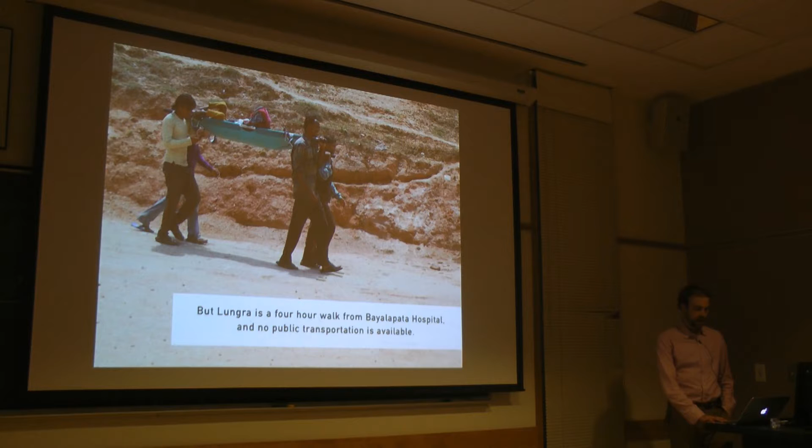This regional hospital serves a large part of Acham, but it's a 4-hour walk from the Lungra Health Clinic. So it's really difficult for people to reach it in time if they have an emergency or if there's some reason that they need to reach it. So basically they're on their own for all intents and purposes.

And before we built the array, the Lungra Health Clinic had no access to energy. So a number of things that we take for granted were totally impossible. This is maybe unintentionally ominous — I guess lots of babies are delivered in the dark, but of course this and many other procedures and things we take for granted are really difficult when you have no access to light, no ability to power basic medical machinery that can prevent easily preventable instances of infant mortality or other diseases. So it's a big problem. There were even instances where you couldn't charge your cell phone, you couldn't power any sort of light source.

So what SunFarmer did, in partnership with a group called Possible Health, or locally known as Nyaya Health — you might have heard of that name as well — we formed a small local committee that would be able to manage and take care of the array after it was constructed, because as mentioned before, it's a 14-hour, maybe 20-hour journey to reach this health clinic. So you definitely don't want to rely on any sort of maintenance crews that have to access it. We wanted to make sure that the local community was really involved in understanding what functions the array would perform, and that they would be able to assist in repairing it.

So we built, I think it was a 1.2 kilowatt array that, in addition to providing lights and powering some small medical machinery, can also power refrigeration for vaccines and other services. In partnership with the government of Nepal and many supporters around the world, we were able to complete the project.

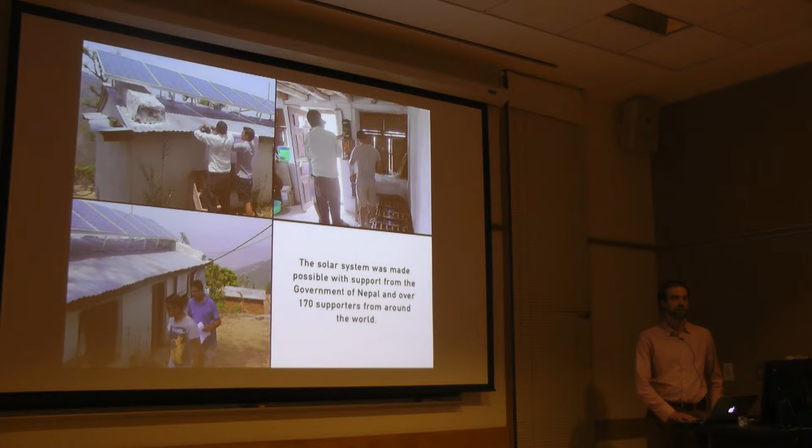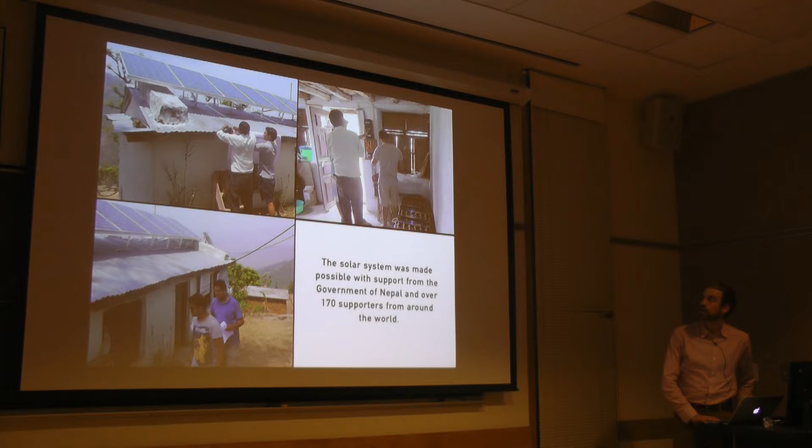This was one of about, I think, 15 health clinics we built in this series. You can see here there's an array of lead-acid batteries, because when you have no grid, you have to put the energy somewhere when you're not using it. And you can see that there's just very simple roof racking to put the array on the rooftop. So now the health clinic has access to energy, and there's a lot of improvements that come with that.

So I just wanted to start with that really simple story. Of course, a 1.6 kilowatt array is quite small, and while the impact for a number of people here could be quite large, it's not on the systemic scale that a place like Nepal and a lot of other places in the greater Himalayan region require to actually get them out of pervasive energy poverty, where there's just totally inadequate electricity generation relative to demand. So I think I want to spend the rest of the talk talking at a sort of bigger picture.

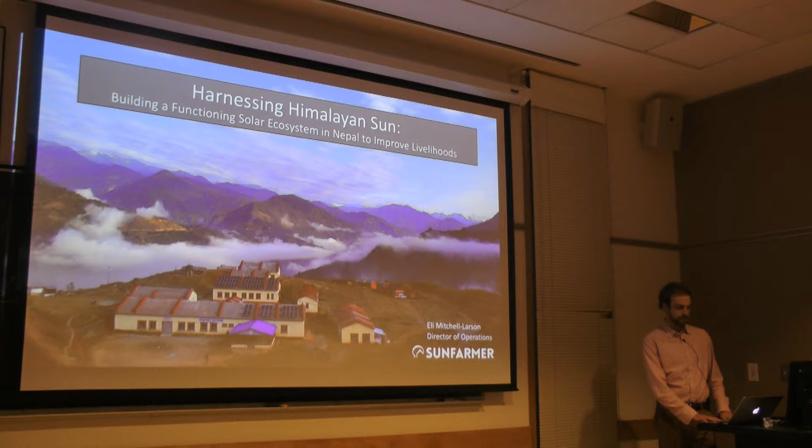How do we get to a systemic scale of solving energy poverty and providing energy access? What are the big opportunities for doing that, and what are the barriers to achieving it? So first, we're just going to talk about the basic problem.

Is this covering the screen? I guess it's a little bit wide.

Nepal's development is perhaps stymied by a lot of things we could discuss, but one that's very clear is lack of electricity. Here's an image of Kathmandu, a lot of these are telecommunication lines. There's probably some pilferage where people are drawing their own lines off the main distribution line. But basically, Nepal's development is held back by a lack of electricity generation.

And that's despite really bountiful resources. I think Nepal has the second highest hydro resource of any country, so there's huge potential, gigawatts and gigawatts of potential generating capacity. There's also a really great solar resource. But despite that, those projects haven't seen fruition yet.

And third, it's really difficult to extend the traditional hub and spoke model grid to these remote regions. It's extremely expensive and probably uneconomical. So there's a real need for a distributed solution. The challenge we see is: how do you bring power to the people that need it most, but in a way that's scalable, cost-effective, and equitable?

In the health clinic example, I think that's a really great project, but it relied heavily on donor funding, and it's not clear that building a series of 2 kilowatt health clinic arrays is going to bring energy access across Nepal. Obviously, we need a more scalable solution.

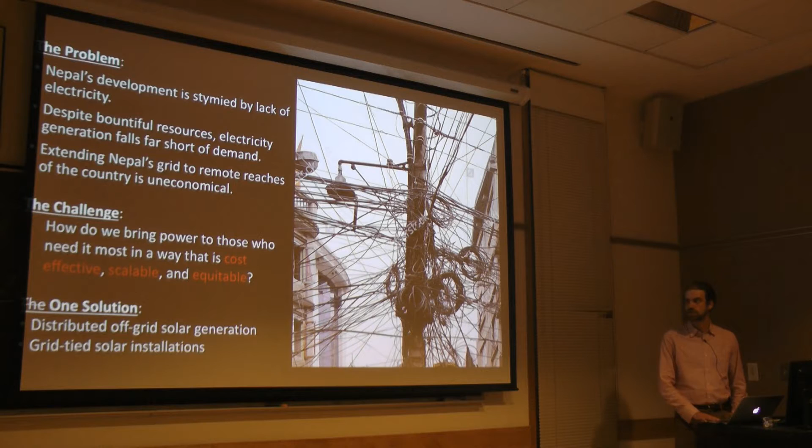So the solutions I want to talk about today, and definitely not the only solutions, because of course large hydropower could also solve a lot of these problems, not all of them. But the solution I want to talk about today is distributed off-grid solar generation as well as grid-tied solar generation.

So first, just a little bit about electricity in Nepal. Basically Nepal is starved for energy. The total fleet, the generating capacity, is around 800 megawatts.

Please stop me if any terms I'm using, or any energy-specific talk, needs a little bit of clarification. But just to put it into context, 800 megawatts, this large pie chart, compared to the New Haven power plant, which is 576 megawatts, compared to the Yale Central Power Plant, which combined can produce about 18 megawatts at full load. And of course, neither of these power plants need to operate at full capacity for a lot of the time. So that just puts it in perspective how an entire country of 30 million people has a generating fleet that's not significantly many orders of magnitude bigger than what we use to power our city.

And also grid access is low. So only about half the people in Nepal have access to grid connectivity, but many of those people, there's very little energy flowing through that distribution network. So you might be technically grid-tied, but in reality you don't have great access to power.

In urban centers like Kathmandu, pretty much everybody's on the grid, but as we'll see in the next slide, that does not mean they have consistent access to power. In rural areas, of course, very few people have access to the electrical grid. And of course, demand is rapidly increasing.

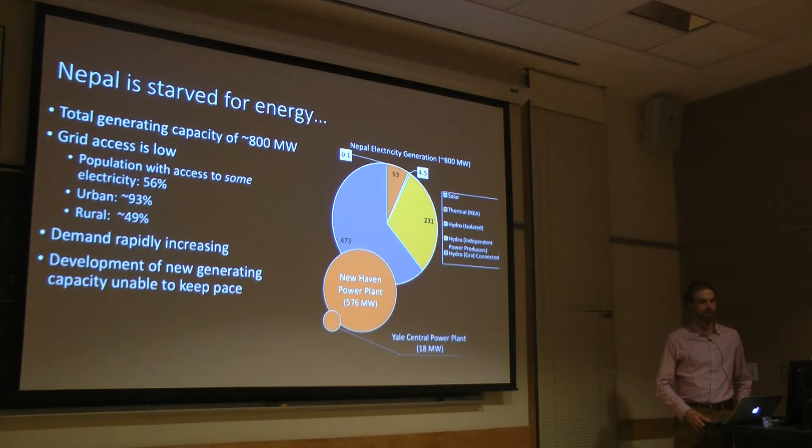And then you can see there's just 0.1 megawatts, that's the entire solar fleet. This data is a couple years old, so it's a little bigger now, but just to put it in context, I think the largest solar array in Nepal is about 700 kilowatts, so less than 1 megawatt.

So what does this mean, to have inconsistent access to power? It means individuals are forced to plan around the uncertainty of what times of day they're going to have access to energy. All kinds of sectors of life are affected, be it access to health, transportation, or education. And small businesses suffer greatly as well.

Rolling blackouts, when the utility deliberately shuts down different portions of the grid at different times of the day, are hugely impactful to small businesses that require certain hours of operation. So all of a sudden they have to shut down at 7 or 8 p.m. when they have no access to light, and that can be really devastating.

And then in terms of industry, inconsistent power could force you to shut down production. Maybe you have a line with 50 employees and all of a sudden you have to send them all home because the power cuts.

Furthermore, any sort of rotating equipment or large processing machinery requires regulation of the grid's frequency. In the US we do this to a very high degree, regulating our frequency to 60 hertz within plus or minus half a hertz. In a place like Nepal, it's extremely variable, and that can be really damaging to industrial equipment.

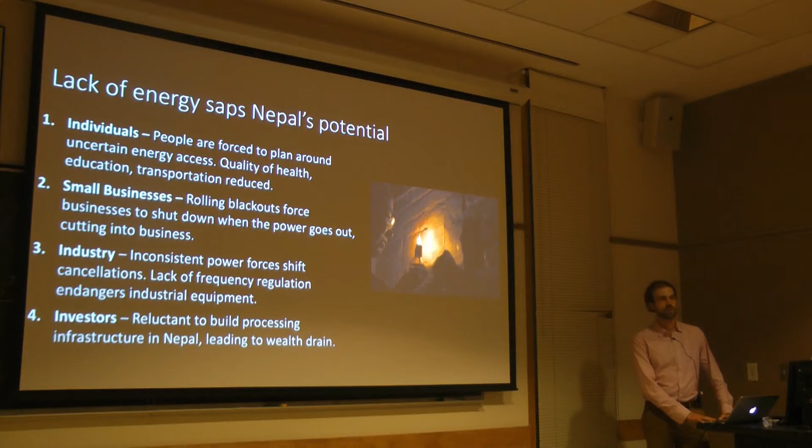This causes investors to hold back on building out that kind of infrastructure because they're not sure their investment is going to be safe. Investors are reluctant to build processing infrastructure because they don't have the power to do so.

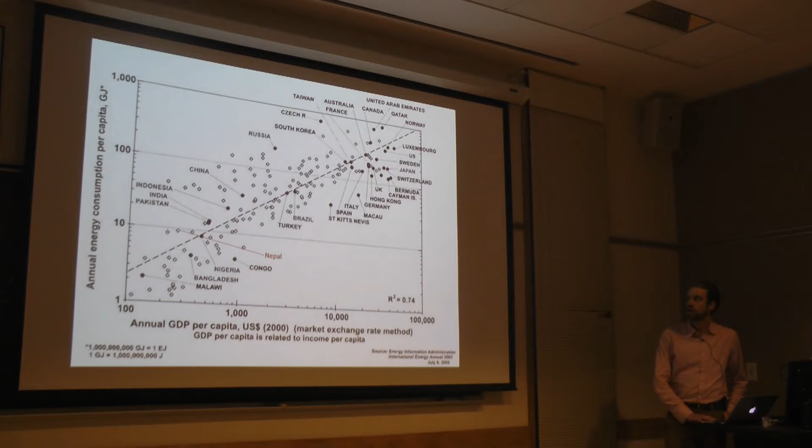One of the issues with Nepal's energy mix, as you saw earlier in the graph, is how much it's dependent on hydro. That has huge implications both economically and politically.

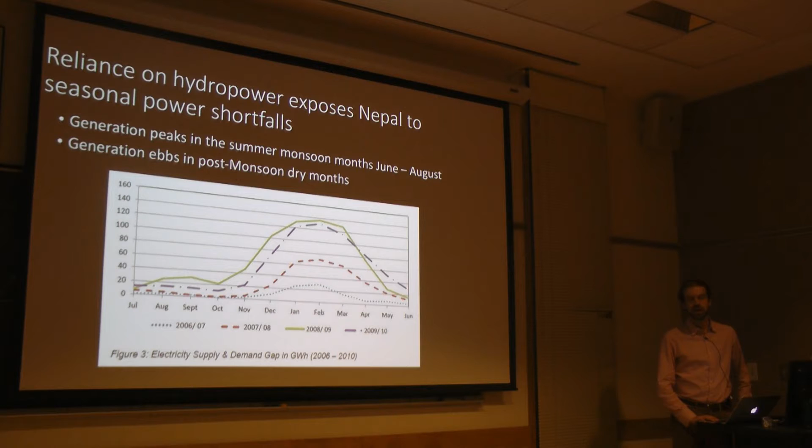If we think that the entire generating capacity is 800 megawatts, this is almost 25% of the entire fleet capacity that's offline because of low rainfall. You can see the lowest line is 2006, then you go up to 2007, then 2008, 2009, and 2010. So there's a trend where every year, because demand is increasing but additional hydro plants aren't coming online, the shortfall is getting more and more dramatic.

Nepal, by regulating how much water is flowing through these hydro plants, is directly influencing the entire watersheds that follow that choke point, which is a huge catchment area for India and a huge agricultural production in states like Bihar and elsewhere in northern India. So Nepal, in a way, has a lot of power over how much water flows to those regions, but they're also beholden to their much larger neighbor, India. So they don't have a lot of choice in terms of when they have to turn the power on and off, other than to maintain this reservoir size.

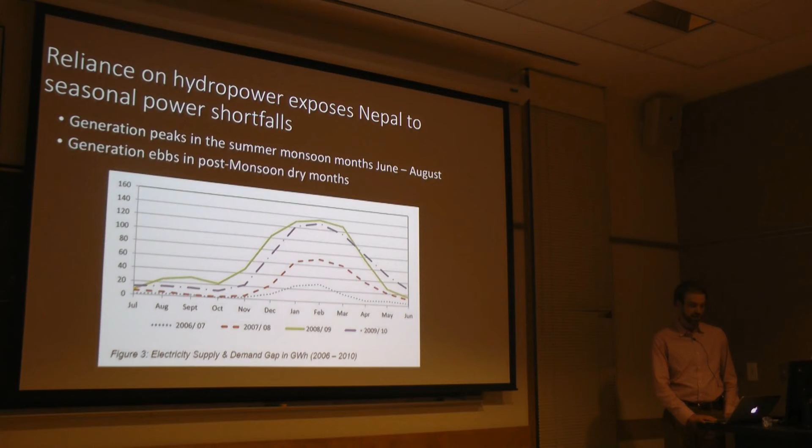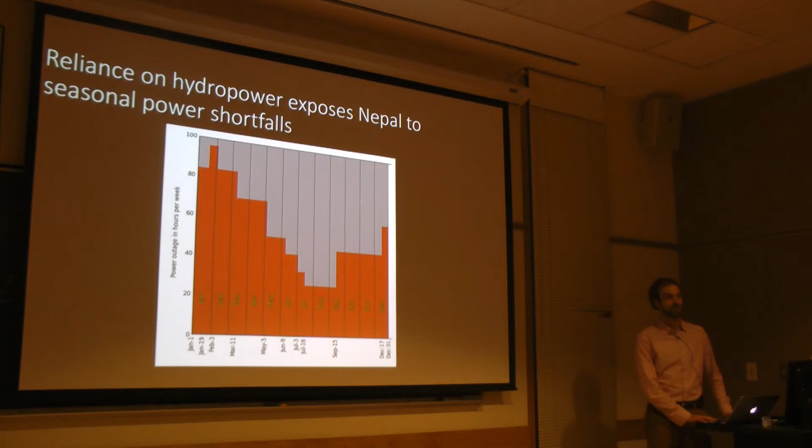The silver lining for us is that a lot more people are asking to build systems at that time of year. But then it's a lot like in the Northeast, where people make investments in heating and energy efficiency in the winter when their power bills are very high, and then in the summer they forget about it. So there's this cyclicity in terms of people's frustration with their utility.

So load shedding, I keep throwing this term around. This is a term that I wasn't familiar with until I visited Nepal, but every single Nepali is intimately aware of this term.

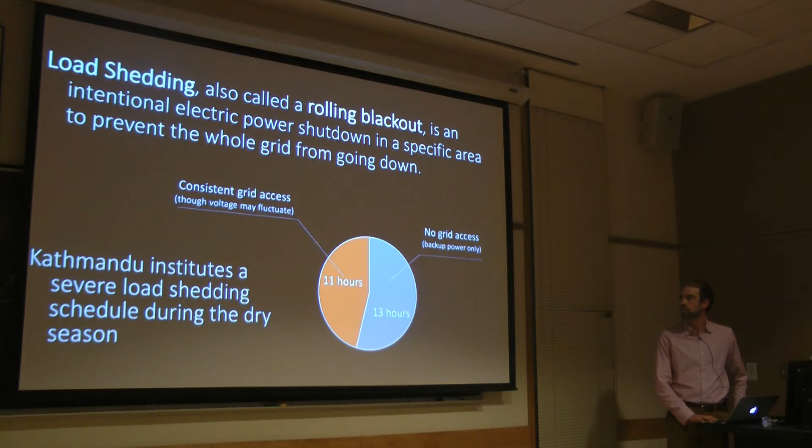It's a term used across the entire South Asia region. It's another term for rolling blackouts, which is intentionally shutting off power to specific regions, kind of like a patchwork effect in the city, so that different people have power at different times because they can't simultaneously provide power to everyone. Right now, Kathmandu is up to about 13 hours of load shedding a day, and it's not all at once either. It might be from 8 p.m. till midnight, and then you have power until 4 a.m. So it's inconsistent, and it causes you to make a lot of plans to orient your life around when you have power and when you don't.

One thing that I was humbled by, just talking to many Nepalis in Kathmandu, was what a deep understanding of electricity the everyday person has. People take matters into their own hands and purchase what they call inverters, which are actually just banks of batteries that they can charge up when there is power and then use to power some appliances in their house. So almost every house is actually wired with separate wiring for the outlets that have backup power and the ones that are grid tied. So you have to strategize what you're charging from, and people are really entrepreneurial in terms of wiring up their own systems.

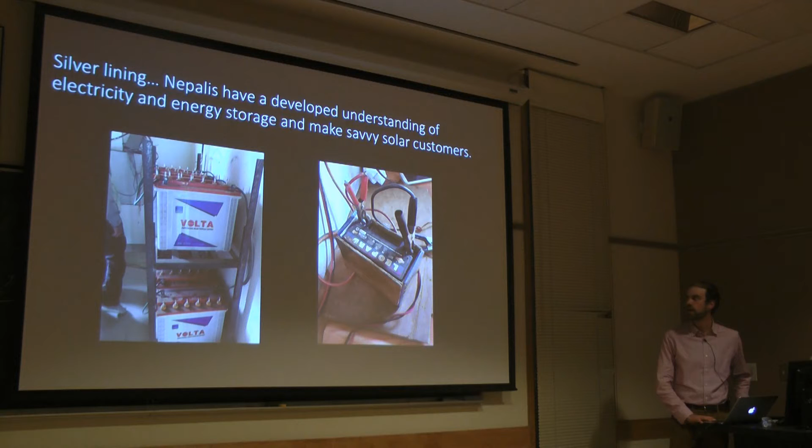This is a battery that somebody was able to move around within the room and connect to whatever light source they wanted. That was in a pretty rural area. People come up with great ways to get around the fact that they don't have consistent power.

We've mentioned a lot about hydropower, the heavy reliance on hydro. Why would we consider another generating source like solar for a case like Nepal? One reason is that there's a complementary generation profile relative to hydropower. Hydropower production is really high in the monsoon season and really low in the dry season. Kathmandu is quite sunny pretty much year-round, but solar actually has the highest generating profile in the non-monsoon months when there's less cloud cover and insolation is higher. So there's a complementary effect where when hydropower is really high, solar power is low and vice versa, creating an opportunity to smooth out that imbalance we talked about earlier.

Also, solar has really low maintenance and ongoing operating costs. Once you've installed it, it's virtually free to run. It's just the upfront cost, which, to point number 3, has been rapidly dropping.

In the US, it was maybe $8 a watt 10 years ago, then it dropped to $4 a watt, then $2. It keeps halving in price, and the quality of those cheaper components is also improving. And as I mentioned, there's an excellent solar resource in Nepal, and solar is really quickly deployable.

Some of these large hydro projects may take 5 or 6 years, and actually recently a Norwegian company, after spending I think 6 years in conversation with NEA and all these institutions in Nepal, just was unable to get their project over the line. They just left the country and abandoned the project, and probably tens of millions of dollars in development costs were sunk.

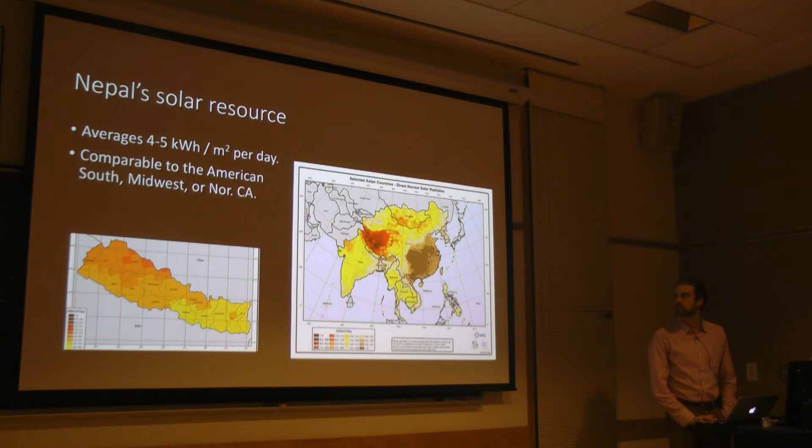So just really briefly, Nepal's solar resource is on the order of 4 to 5 kilowatt hours per meter squared per day, which is comparable to... here you can see that the really potent solar resource is sort of in the Tibetan area and maybe verging into Humla and some of the western reaches of Nepal, but Nepal itself is pretty comparable to the American South. So it's a really favorable solar resource.

So now we're going to shift gears and talk about, now that we have sort of a framework for the challenges of the Nepal electricity generating fleet and what needs to happen, what's actually holding back larger scale commercial solar development from taking place.

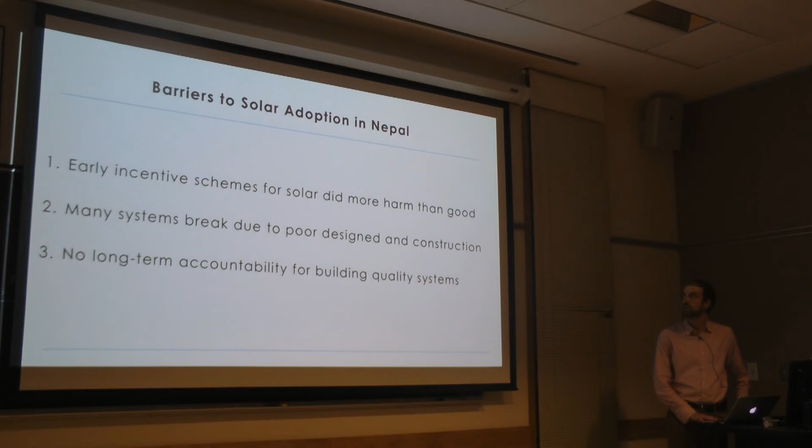So now let's bring it back down to earth and talk about barriers to adoption of solar that are a little bit more accessible and that SunFarmer can actually affect. There were issues with the early incentive schemes used to promote solar. There was also a pattern of systems breaking due to poor design and construction. And there's also an issue of long-term accountability.

Just to walk through the second point: what we found when we first entered Nepal in 2014 is that a lot of these projects, getting built by NGOs and paid for by foreign aid dollars, would break after 1 or 2 years. Maybe they were poorly wired, or the technology used was very low quality, and nobody was really monitoring these systems or watching over them.

And to point number 3, there was no long-term accountability. This is a new industry. Understandably, there's lots of entrepreneurs in Kathmandu who say, okay, it's easy enough, I can import solar panels from India, set up the systems, and sell them. That makes a lot of sense. But these people didn't have experience installing these systems. They were really just traders, importing a product, assembling it, and selling it.

So when these systems broke and the customer called up the very small company they employed to install the system, nobody answered the phone, and the people were nowhere to be found. That was an issue that we heard again and again.

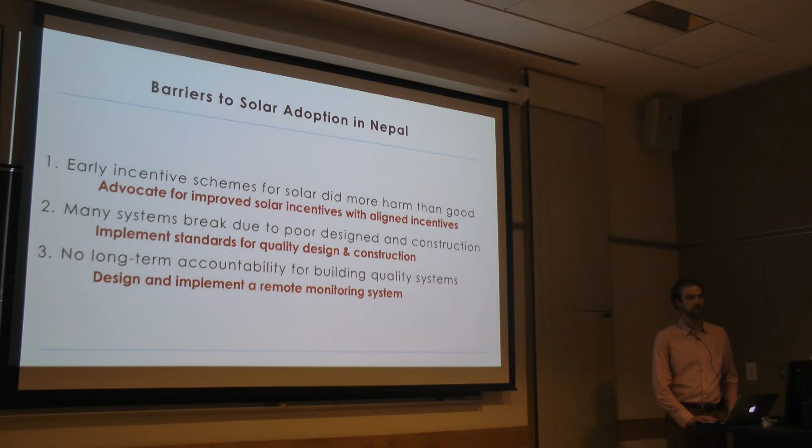In terms of the three interventions we use to improve the commercial PV ecosystem: the first was that, maybe a lot of you are familiar in the US with the investment tax credit and incentives that the government puts out to incentivize people to build renewable energy. In Nepal, the incentive in place was that anytime someone built a solar installation, the government would basically provide a percentage rebate, a grant effectively to rebate a percentage of that project, which is really simple to understand and easy to operate.

But the problem was that the contractors I mentioned, who might disappear after a couple of years because they moved on to another business, were inflating project costs and oversizing the batteries or panels relative to what the customer actually needed, just to get a higher subsidy from the government. This was a huge misalignment between the customer and the contractor, because if the contractor is receiving that subsidy, yes it allows them to provide a lower price to the consumer, but they're the ones getting that money. So their incentive is to build as many projects as possible, as quickly as possible, and make them as expensive as possible, even if they don't need to be. This was a real problem.

The president of SunFarmer Nepal actually used to work in the Alternative Energy Promotion Center of Nepal. Through two years of lobbying and advocacy, SunFarmer, among many other players, really made the point that this system was not working and we needed a new incentive system.

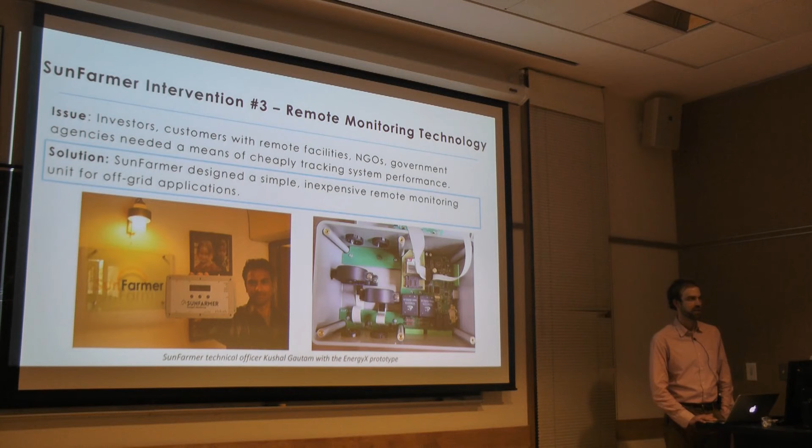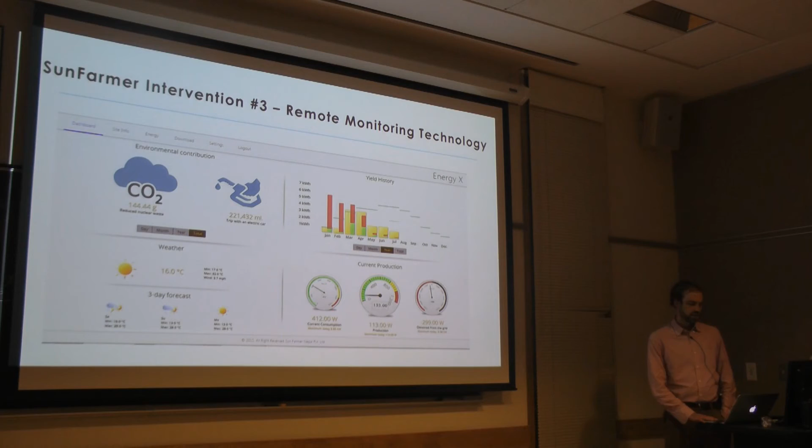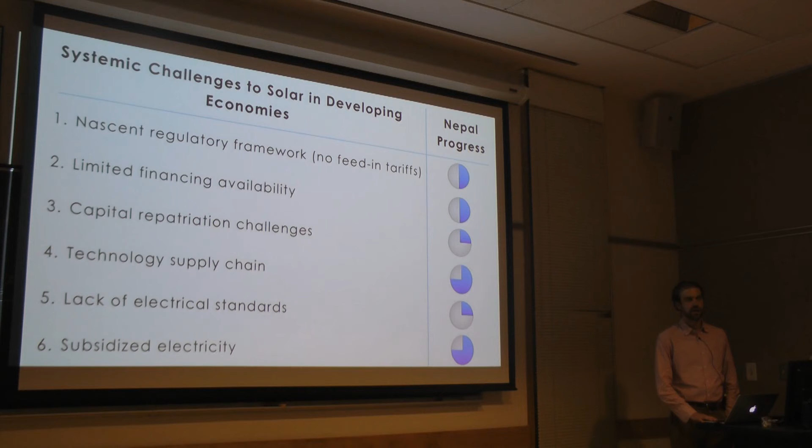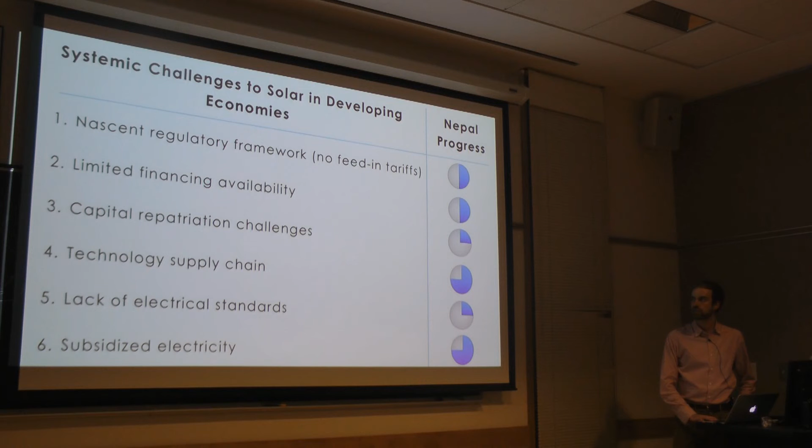And so we're able to track a bunch of different metrics remotely through an online interface. So those are the systemic challenges to building solar in emerging markets, which aren't going away and need a lot of effort from organizations like USAID and the Millennium Challenge Corporation, people working in concert with the Nepali government and other governments in the region to work some of these out so that there's less friction for investors to come in. But in terms of specific barriers that we can tackle right now, this is what we identified, and this is what we built our business around on the commercial side.

Now I'm going to switch gears and talk about - we mentioned in the beginning that the goal was to provide energy to those who need it most, and to be equitable in terms of how solar is being developed, making sure it's reaching the bottom of the pyramid, and that there's a path to people who live in regions that aren't going to get the grid realistically for years to come, or aren't necessarily going to get the attention that residents of a larger city like Kathmandu are going to get. What's the answer? What's the solution to bringing power to people in those kinds of settings?

So the approach that we took was we looked at different customer segments, and we thought, where can solar play a really powerful role? And what we found is that in Nepal, about 70% of the population is working in agriculture in some way, shape, or form.

But what's surprising is that nevertheless, Nepal is still a net importer of food. And that's because the growing season without any irrigation is only 3 months during that monsoon period. So unless you have some sort of pump or way to irrigate your farm, you're only going to be growing crops for 3 or 4 months a year.

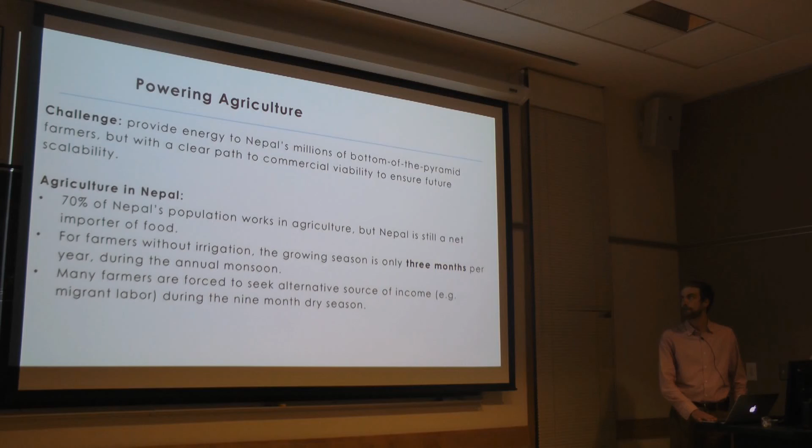Many farmers are able to irrigate their farms, and some are using treadle pumps—actually a manual pump that you would almost pedal with your feet. Some people are using manual irrigation where they've dug ditches and they're just bringing water around.

But a lot of farmers are able to purchase or rent diesel-powered pumps, which are really cheap, but you have to keep putting fuel in them. So there's a lot of long-term operating costs—you have to keep them running, keep them maintained. If you're renting, you have to pay per hour to use the pump, so there's often no path to ownership, and people are just stuck pouring money into these pumps to irrigate their farm.

So we think a really elegant solution is a solar-powered pump that has no moving parts. The generator is fixed and it's going to last for 15 or 20 years with very little maintenance. Hook that up to an AC pump and you're good to go. There's basically no operating costs, so it seems really great.

Unfortunately, these farmers are, at large, pretty impoverished and unable to afford a system like this. So the only way to really do it is to finance the system so that the savings the farmers achieve by displacing diesel are effectively monetized, and they can use that savings—and also hopefully the increase in income from growing crops that have a higher water requirement. If you can go from growing monsoon rice to growing cucumbers, you can dramatically increase your income and better afford to pay on a monthly basis for a financed solar water pumping system.

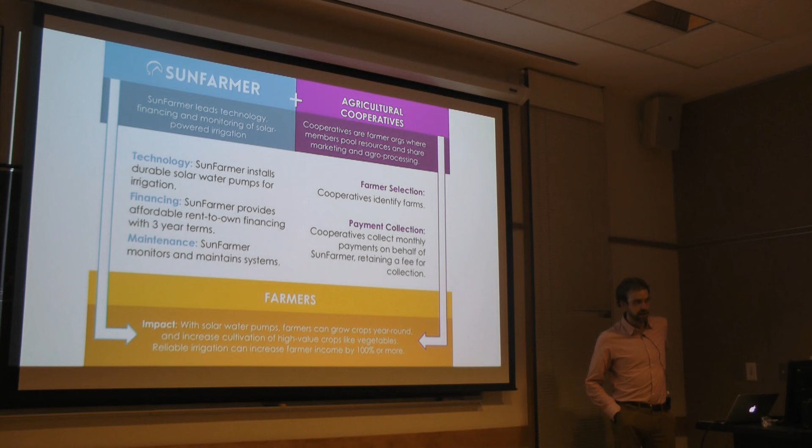And so the model that we created is really—we're the technical experts. What we provide is engineering, design, and mobilization to build these systems, but we don't have on staff a panel of agricultural experts or a field staff that can go out and collect payments from individual farmers. So what we did is partner with the agricultural cooperatives that are already talking to and interacting with hundreds of thousands of farmers. These are the local organizations that provide small microfinance loans to farmers to purchase seed and other agricultural inputs, and maybe also provide trainings for different agricultural technologies. Basically, they're the hub around which the economic activity of a small region of farmers revolves. So we knew that forming those partnerships was really key.

And so we basically provide rent-to-own financing for a 3-year term. We monitor the system and replace anything that breaks during that term, and we pay fees to the cooperatives to have them collect the payments on our behalf. So the goal is that farmers can then grow crops year-round, and increase cultivation of higher value crops, hopefully seeing a huge uplift in their income.

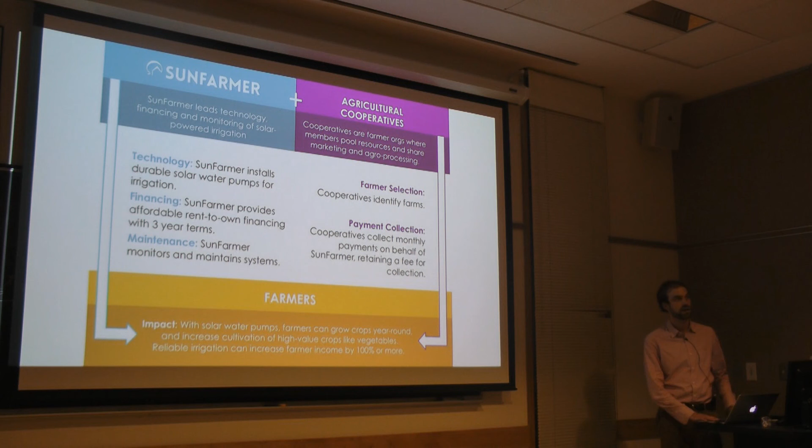So we think there's opportunity for solar-powered water pumping in all of these regions, but particularly in the Terai, where the head—which is the distance you have to pump the water vertically from its source to wherever you're delivering it—is quite low, maybe about 5 or 6 meters, and where there's a lot better market access because you can easily ship your produce to some of the larger cities in the Terai or across the border to India.

We're limited in how we finance these systems by the amount a farmer can pay on a monthly basis. We have to understand how much a farmer can afford and how much they're able to pay towards installments to own the system.

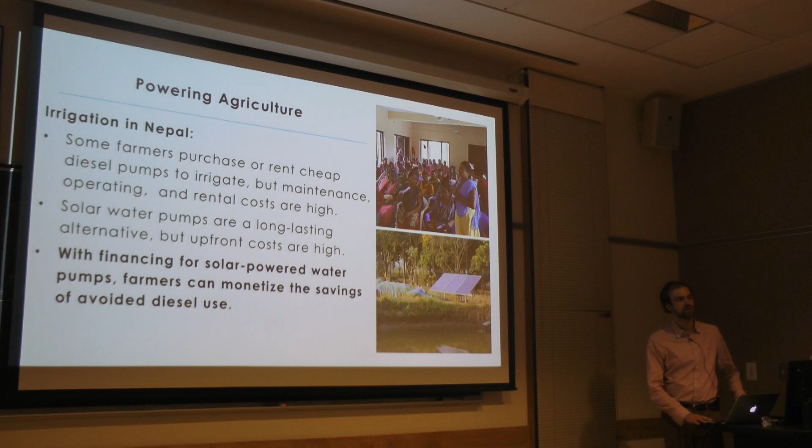How much does the unit cost? It really depends, but in this case, with this women's cooperative, it was 3 women who have a system that provides about 25,000 liters a day, and it was about $2,000, but it was about 40% subsidized. That's the gap for this to be a fully commercially viable product.

To put that in context, a diesel pump might cost like $300 or $400, so it's significantly more expensive. They're going to achieve long-term savings, and the payback's usually around year 6 or 7. But in order to achieve that, you need a way to make it affordable in the meantime.

At the moment, given what farmers in the Terai are able to pay, we have to close the gap with a 40% subsidy. To put this in context, a lot of solar water pumping systems in Nepal are fully subsidized. The government, or like Winrock or various development agencies, will build large systems that are completely free and provide them to communities. But we think that in the long term, it's really important to see a path towards full commercial viability so that this is easily scaled.

The way we see that happening is currently farmers will only sign on to like a 3-year contract. So what we need to do is get the financing on a longer term, and that will require the participation of local banks. In order for them to gain comfort, they're going to have to see a record of repayments over maybe a year or two. We think that within 2 or 3 years, we can get banks comfortable with this technology.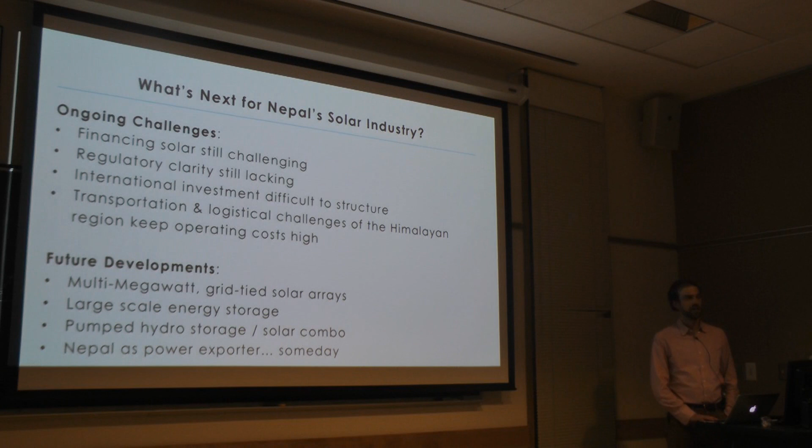In terms of what we're really excited about in the near future, we finally see the opportunity for multi-megawatt projects — something on the order of the Yale power plant that we could actually build if there's a path to selling that energy to the grid. I think someday there's an opportunity for Nepal to be a power exporter. Thinking about hydro, with the second largest hydro resource, it's entirely possible that if Nepal is able to build those very large hydro projects and potentially some very large solar projects as well, they can more than supply energy for their 30 million people, and ship electricity across the border to their very hungry, power-consuming neighbor, India. Those are some of the exciting future developments we're seeing in the next couple of years.